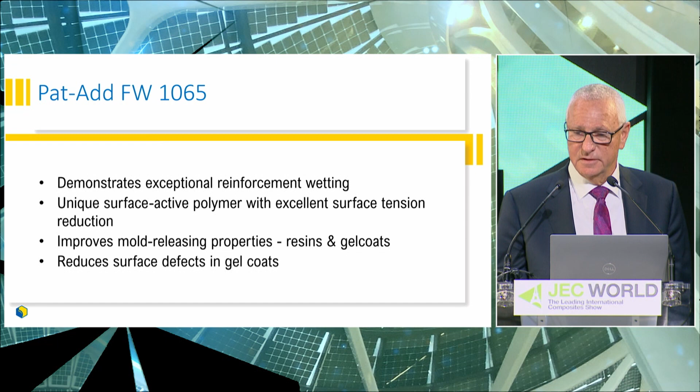Today's presentation, again, is about increased strength laminates. We did laminates with different resins and different reinforcements, and we also did some pultrusion work, so we'll separate them out in two sections. The novel technology I'm talking about goes by the name of Pat-Add FW 1065. It's a polysiloxane or polyether polysiloxane chemistry, and it is a unique surface modifier.

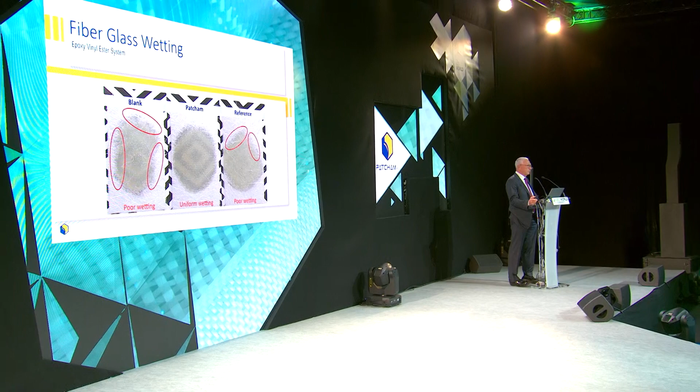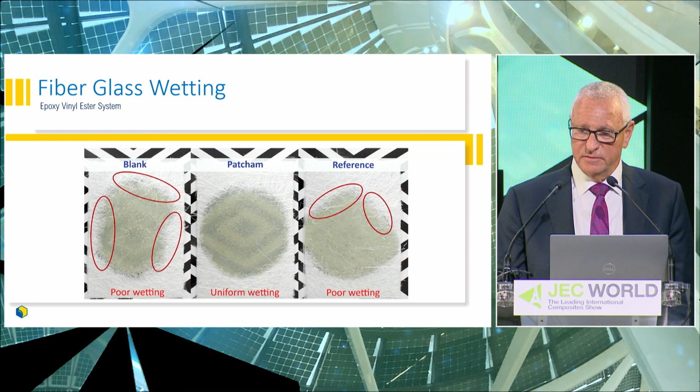So this particular slide, I put it in there because I like it. It's what originally attracted me to doing the work with this product. You can see we poured out some resin with and without the additive, and incidentally, the one on the right is with one of our worthy competitors' reinforcement wetting additive. So you can see from that slide, this kind of inspired me to take a look at it.

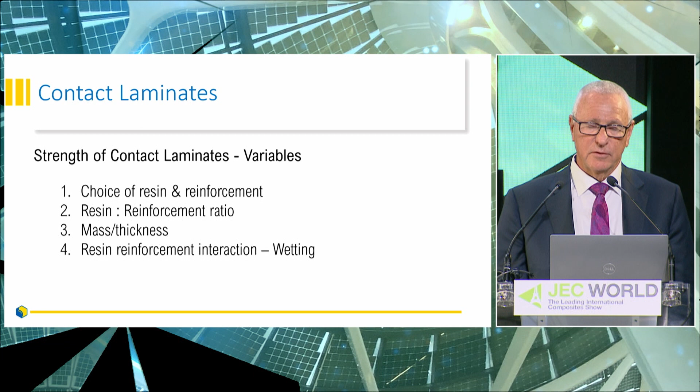So there's a lot of variables when you're making contact laminates. Number 4 on that list is really what we were interested in, and that's the interaction between the resin and the reinforcement, or the wetting of the reinforcing fibers. We did vinyl ester glass, vinyl ester carbon fiber, and epoxy carbon fiber. We didn't do any epoxy glass on this one. And we focused primarily on the D2344 short beam shear.

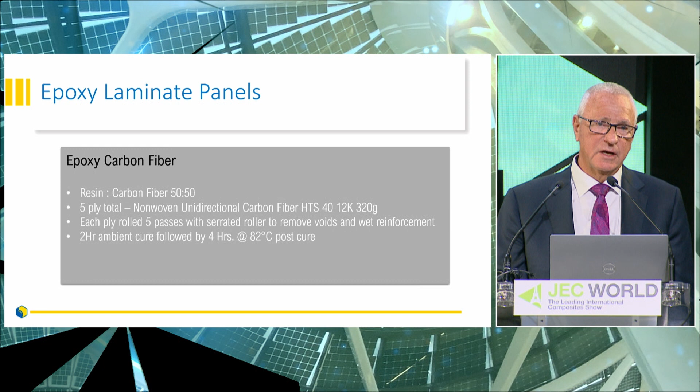Again, we can go through these fairly quickly. We did the carbon fiber resin at 50/50. The vinyl ester glass we did at typical 35/65. They were 5-ply laminates. The glass had chop strand 450, 4 plies with 1 ply woven in the middle, and I just picked a non-woven unidirectional for the carbon fiber. And then the epoxy carbon fiber, again, a 50/50 5-ply. They were all rolled out as equally as you can in a hand-laid laminate. Everything was 2-hour ambient, followed by 82-degree oven for 4 hours.

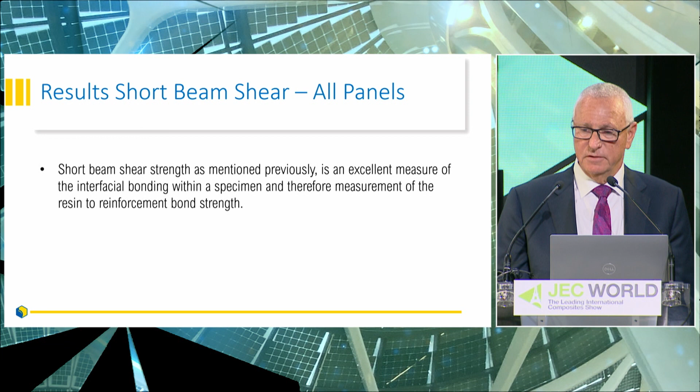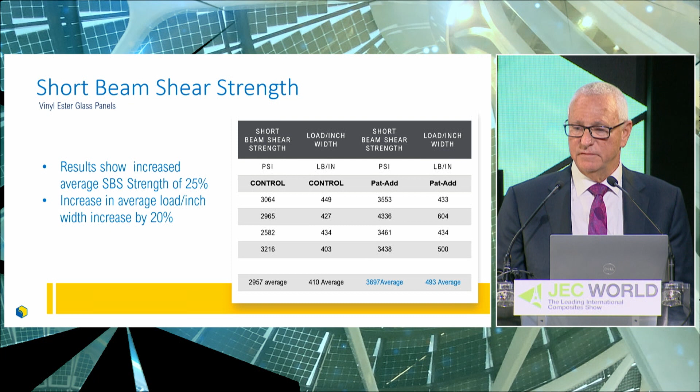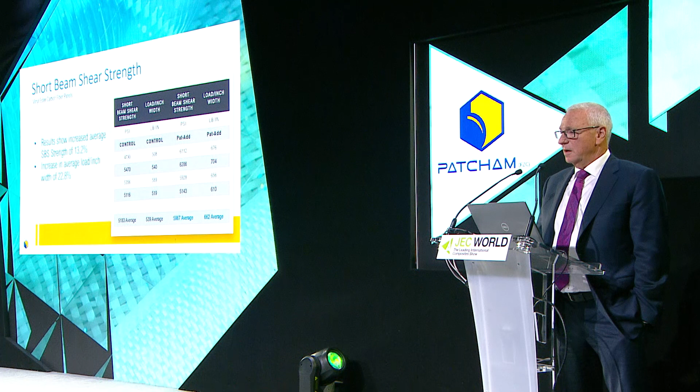So as I said, short beam shear is an excellent measure of interfacial bonding. And here's the results. In the vinyl ester glass panels, we showed an increase in the short beam shear strength of upwards of 25%. That's a pretty significant number. The vinyl ester carbon fiber, we showed 13% increase in strength just through wetting the reinforcing fibers better. And on the epoxy carbon fiber, we showed a short beam shear strength increase of 17%.

By the way, I didn't run the Instron. I had these done in an independent lab, so nobody skewed the results. So in terms of discussion, every laminate's different. You're going to get different results, but certainly the better you wet your reinforcement, the better chance you've got of having a stronger matrix.

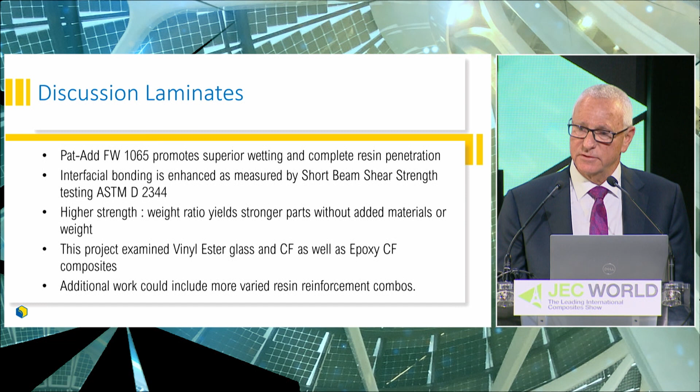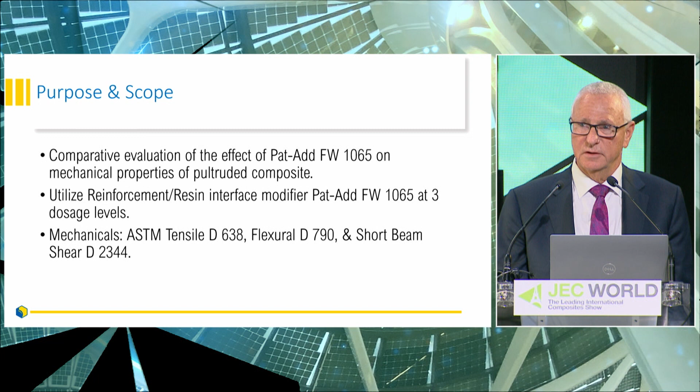And moving on to pultrusion. In pultrusion, we did a dosage study. We used the FW1065 at 3 doses, and in this case we ran the D638 tensiles, the D790 flexurals, and we also ran the short beam shear at 2344. These are just the resin mixes. The control resin had no additive whatsoever, and then 0.3, 0.5, and 0.7 of the FW1065 Pat-Add.

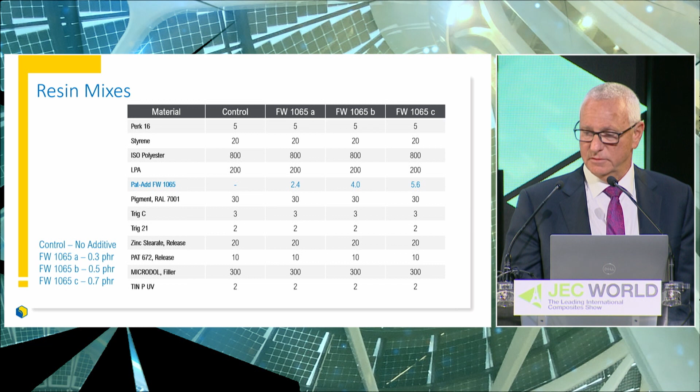The profile we ran, pretty simple, a 3 millimeter by 100 millimeter. We ran it at exactly 0.4 meters per minute through a 1 meter die at 120 and 160 for the 2 heating zones. If you go back to the resin mixes, there's Trig C and Trig 21 in there, and then Perk 16, so there's three peroxides. Fairly simple profile. We got a top and bottom mat and a top and bottom veil, 50 strands of 4800 tex, and then 2 spun up the sides.

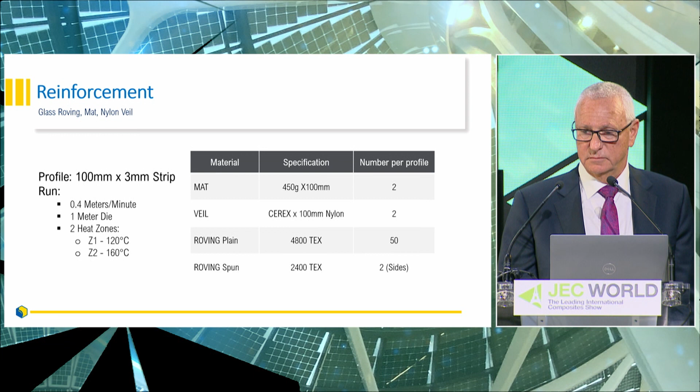Something we noted right out of the gate, fairly interesting, was the pull force as measured on the machine. In this case, the machine converted to pull force based on the amperage draw of the pull motors. And it's a significant reduction in pull force: it went from 35 newtons down to 25 newtons. Everything was kept the same.

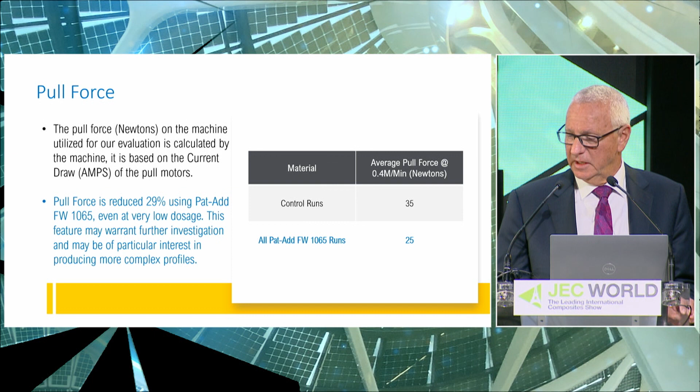So on the tensiles, on the pultrusion, the results weren't quite as dramatic as we saw on the hand-laid laminates, but it's still significant in that you got maximum load in the 0.5. I draw your attention to the 0.5. It seems to be the sweet spot. We got basically almost a 10% increase in maximum load and maximum tensile strength. Slightly less on the modulus.

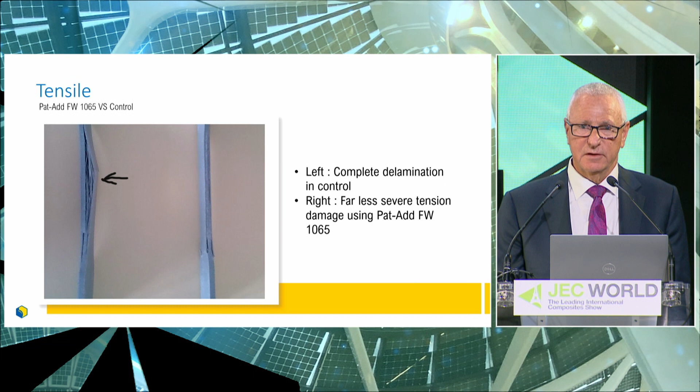Other interesting thing, when you look at these samples, I did kind of cherry pick these things, but it was fairly common right across the board: without the additive, the tensile dog bones completely delaminated, whereas with the additive, obviously they broke because that's what the test does, but they tended to fail right where the grippers were, and they didn't, for lack of a better word, explode like the parts without the additive.

And we ran flexurals with this type of linear laminate. You wouldn't really expect the flexurals to be all that much different. We were pleasantly surprised when we saw the modulus go up by anywhere from 10 to 11%. Again, I wasn't necessarily expecting that.

And short beam shear, not nearly as dramatic as we saw on the contact laminates, but still significant when you got a 3.8% increase in the maximum load on the short beam shear or interlaminar strength, just by putting in 0.5 parts per 100 of an additive.

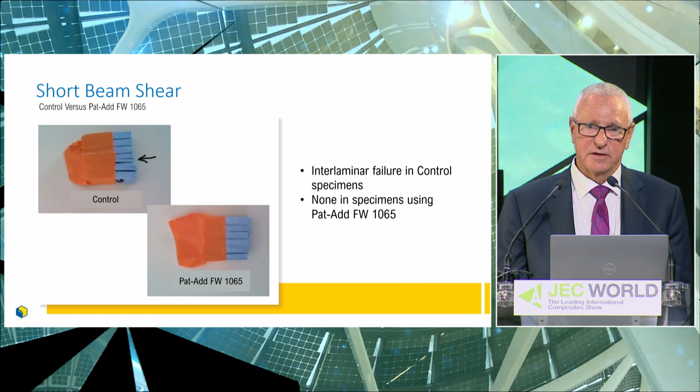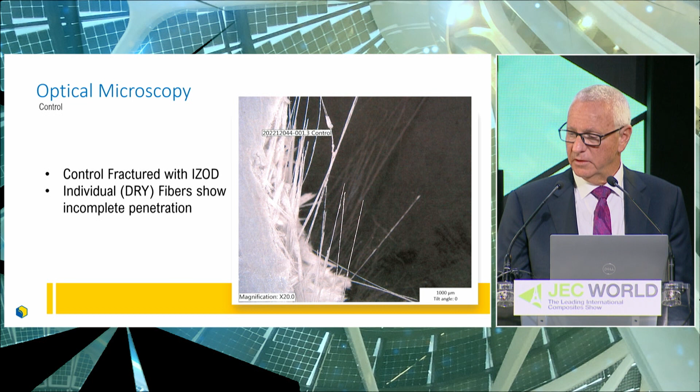So we had some friends at Pultrusion do some microscopy for us. Thanks for that. And I should probably have put these on the same page, but this is the control, and you can see the single strands not all that well wetted out with resin. And then this is the 0.5 parts per 100 of the 1065, and you can clearly see the noise you've got in there, which is the resin that's adhered to the fibers. And this is 20 times on an optical.

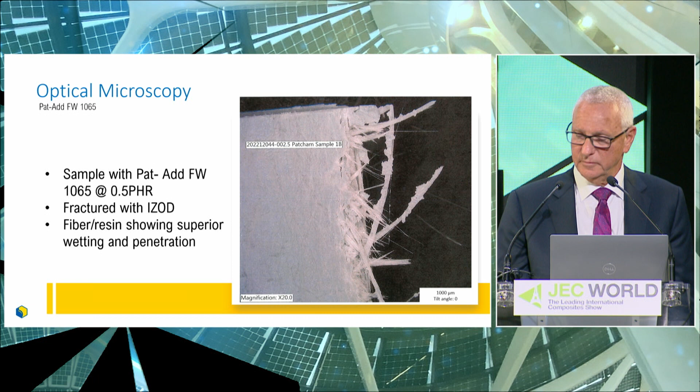So I got through this a lot faster than I thought I would, which does leave room for some questions. Really, the summary here just tells you that the 0.5 parts per 100 is probably the sweet spot in these applications. With your own fabrication methods and optimization, you're obviously going to get different results, but there's no question better wetting of the reinforcement is going to give you improved strength.

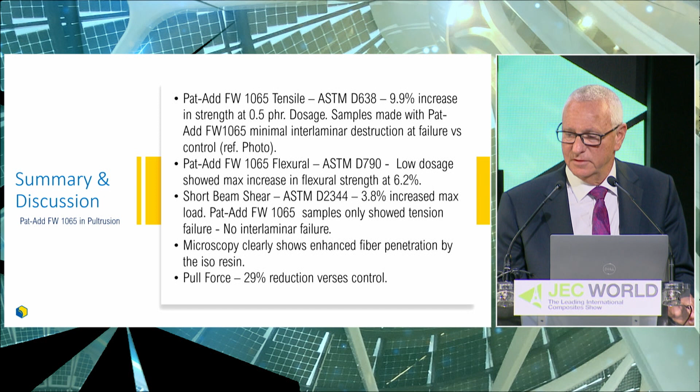So we got 10 minutes for questions. Anybody have questions? Sorry, somebody's going to bring a microphone over. Oh.

Mr. Richmond, congratulations on the excellent work on the mechanicals. What I'm interested to know is, is there any influence on the resin itself, anything to do with the shelf life of the resin, chemical resistance or pigmentability? We haven't done the actual chemical resistance on it, but we wouldn't expect any adverse effects. Certainly not in storage. It isn't reactive. It's a polyether polysiloxane, so there's no impact on the storage.

It can be added just before usage, or it could be put in at the resin manufacturing stage. It doesn't really matter. I would always put it in before I put in any fillers anyway, because it will not only wet the reinforcement, but it'll help wet the fillers when you're trying to disperse them. So you might as well take advantage of that. But as far as the chemical, I wouldn't expect any, but we don't have any empirical data.